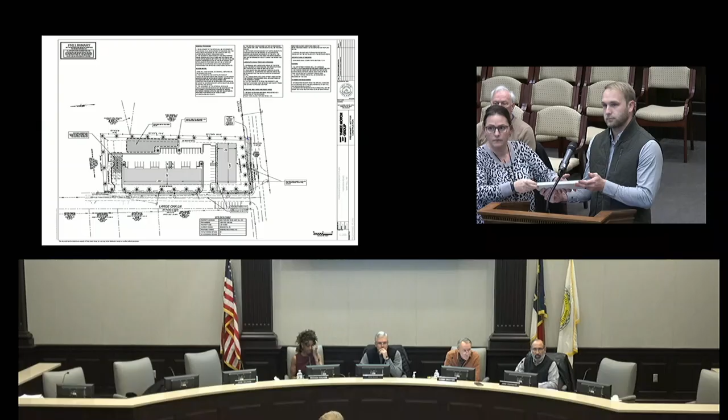Maybe... Space, no, bar. Sorry. Here, I'll just run it. Yeah, there you go, we'll just do it. Was that me or you? I'll run it. Okay, just tell me when to change it.

Yes sir, as you can see, the Large Oak Lane unit will be more sectioned off into smaller units for more small business type operations that has storage and a small office with it. The one facing Fairview Road will be more standard office businesses that you see. There will be a septic system on this parcel, as you can see in the back right corner if you're looking at it from Fairview Road. The sewer stops a couple parcels back, kind of in front of the firehouse there, and then it starts going negative fall back towards...

485. So we had to design a septic system onto this one. Not what we wanted to do. If there's any way we could get tie into that septic or sewer system, that would be what we prefer. But as you see right now, it's designed for a septic system to make sure it would work. And then we have an underground detention system on the back of the property that would house all the stormwater. We do have a fence and trees that outline the property, kind of for hiding the parking.

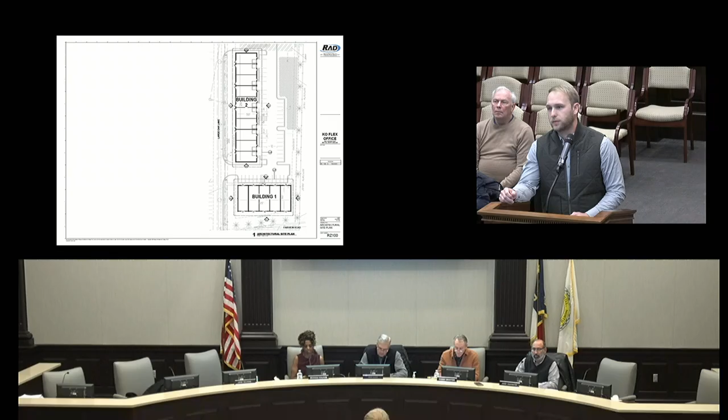These are the kind of standard layouts that we have for the elevations. Four-sided brick. There will be windows and doors in the front. The back sections will come with a roll-up garage, as you'll see for the flex side. You can go to the next one, John. There's the back section. So each unit will have its own warehouse type space, and we'll put an office in there as well too with it.

These are just more side elevations, back elevations for it. Kind of more up close.

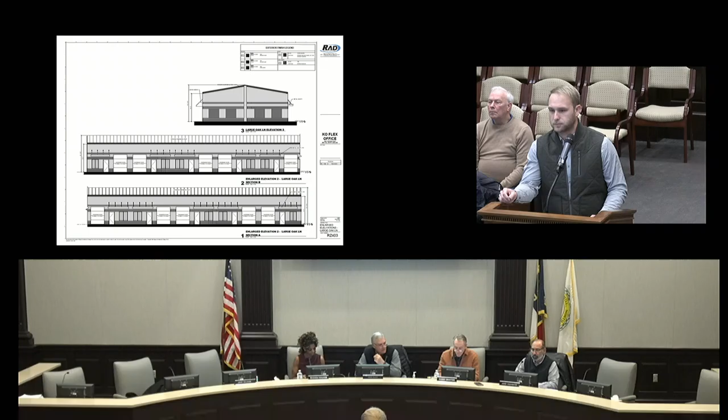Jim, anything? Yes, how did you estimate the number of parking spaces necessary to support these two buildings? The parking that we have here, we followed the outline you guys have in the UDO. So it's 2.5 parking spaces is what we have right now. Obviously that's not what we wanted, but with the septic system and underground detention system, we tried to fit as much as we could on there. If there's any way possible we can get more, we're not opposed to that. But as it sits right now, that's where we could fit them in.

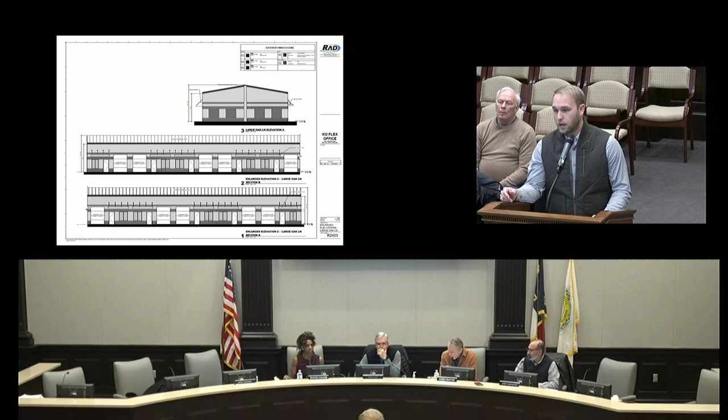Kenny? So this will be primarily storage? Not storage, no, it'll be office warehouse. Think of an HVAC contractor who needs office space to run a couple people out of the office and have storage for their metal bending, or auto detailing that rolls a car in there to detail, with office space for office work. So we're targeting more small business, the smaller side, people who need space to store a couple things and work on them, as well as that true office feel with a couple desks and a couple assistants.

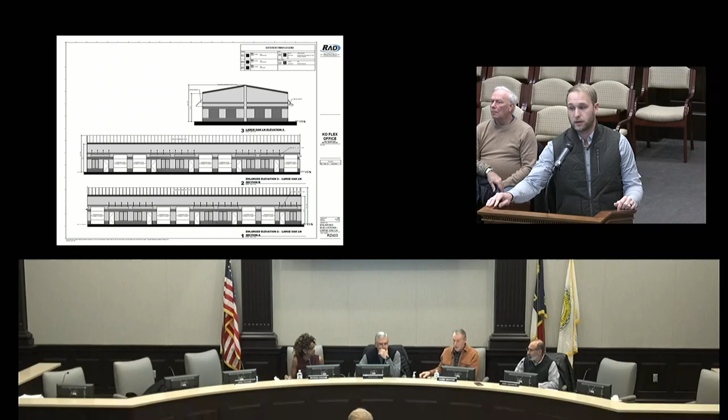Okay, and I was thinking there was a plan that had topo on it. Do you remember if y'all had a plan with topo? Because what I was getting at is you have underground detention, and I didn't see a way, it looks like the only place you can send it is to the back right corner if you're looking at it from Fairview. Is that the way the topo runs, enough fall there to have a positive outfall for the underground detention? Oh yeah, absolutely, because that's the way it all tracks back to that back right corner. Because the parcel to the back right, if you're looking at the paper, that's where the pond is for that park. So all of it falls back towards that pond.

But your underground detention is going to be, what, 4 feet beneath the ground? It'll have to be spec'd out by the engineers depending on capacity. That's what I was getting at, and the reason I'm saying this is if you're planning on it and it doesn't work, we need to know that now. But the underground detention, will it have enough capacity for what we're looking at here? Yeah, definitely. Well, I'm talking about the release. The release, yeah, it's engineered for that.

Okay, so they've got a positive outfall from the bottom of the underground detention. Yes, sir. And that's in the greater detail of our engineered plans, not in just the zoning plan we're showing here.

Okay, yeah, I didn't see that much relief on your site, so I was thinking, are you going to have to get an easement from this guy to dig and put in a ditch or pipe? I didn't see how. No, the outflow should come right out the back, and we should have enough fall from there because we'll build the site up. You can see the retaining wall where the parking spots are. Once that's built up, we'll have enough fall coming down from that retaining wall to get back to that corner, as well as natural fall, because that's where it all slopes right now too. But it's got to fall from 4 feet beneath that retaining wall. Correct, yes sir. So I was just concerned that you had enough room for that.

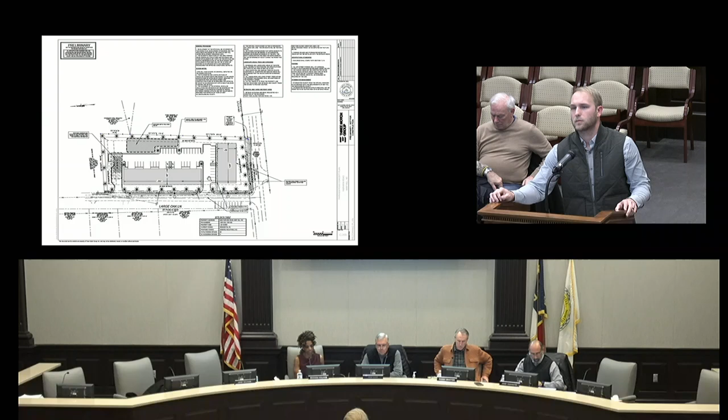All those little star sections there where the road is are the trees on the property. Yes, and they're roughly 30 feet apart? No, I'd say they're closer than 40. No, they're farther than that. Let's see, 1, 2, 3, 4, 5, 6, 7, 8, 9. Say they're roughly 50 feet apart.

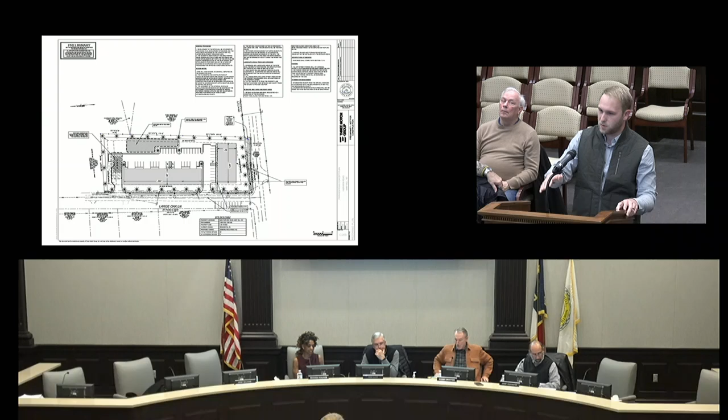What I was saying, understory in between the large maturing canopy trees. I see what you're saying. So you're looking at a large maturing canopy versus a small maturing tree, just lining with tall big trees. And I'm thinking whatever goes next to there, what's there now, John?

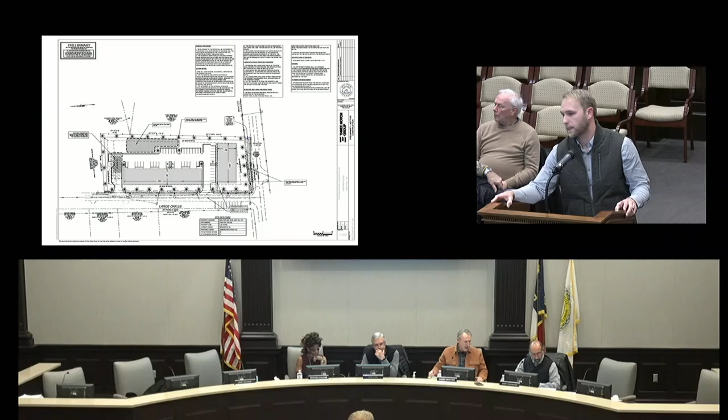Is it on the east side? Is that residential or is it? That's that way. Right now there's a house there. I'm not sure of the directions. Towards 485, yeah, it's 2 homes.

Right there. So if those stayed for whatever, like I said, add some understory screening, that's fine, that's no problem. But I don't think there's enough right of way to put in turn lanes. Right turn lanes are nice, but they're not a problem solver. Left turn lanes are the problem solver, but the problem is having enough room to fit them in. And I don't know that we'll ever have enough room to widen.

Fairview to accommodate a third lane. Oh yeah, I agree, because even going where the bank is, that left turn lane, people get confused and they're going in right there with the BP. So trying to do, I'd say an unfavorable recommendation.

I'd like—all right Jim, you got anything else? No. All right Kenny, so can I get a motion? I'd like to make a motion for an unfavorable recommendation. All right, you need to read this whole thing here.

It's part of your motion. ZC 25-11 appears to be inconsistent with the adopted land use plan, which designates the subject properties for mixed residential. This area is characterized by moderate density residential development, comprised predominantly of single-family detached homes, as well as attached single-family units such as townhomes and duplexes. The mix of housing types is intended to create intergenerational neighborhoods and appeal to a variety of age groups and lifestyle preferences.

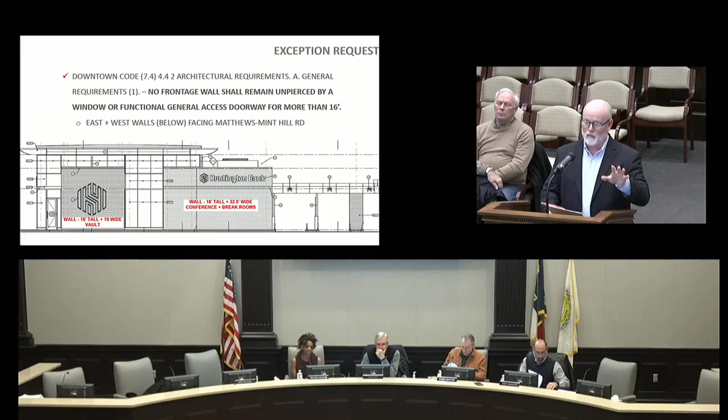Now, there are some design features incorporated into this building that will help mitigate the exception requests we're asking for. One will be the use of signage along these areas to break up those walls. Differing exterior building materials will also be used — you'll see in the following slides we have some glazed brick for one portion, white brick for the other. There'll be windows along the front, and also a roof overhang.

There is a ribbon of windows along the top that'll offer a lot of natural light inside the building. The roof overhang will project out just about as far as the vault wall itself, so there'll be a lot of differing materials, and it just will not be a stark looking wall there.

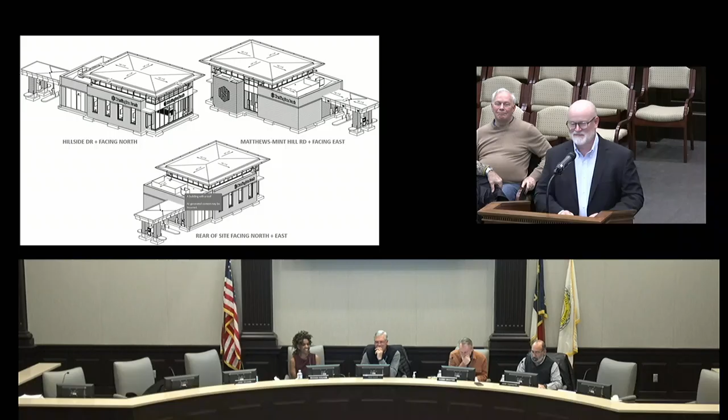I like it, the way it looks, but I'm wondering if it would go with the rest of the town down the street with the colors. I mean, green is my favorite color, but maybe I'm just thinking too far ahead. Has no one thought about that? I don't think we have a color definition. Okay, in the ordinances it doesn't matter. I'm red-green colorblind, so don't look at me.

It's just that we've got the regular brick going all the way down. That's all I have. Understand? Okay, yes ma'am, thank you. All right, Kenny? Thank you, Mr. Chairman.

Thank you, Eddie. I'm just worried when people come in... once you get past the lane coming out of the drive-through into that main stub that comes off of Hillside, there's a bunch of area to the right that I'm thinking about. It was an all or nothing deal when it came to the potential purchase of the property itself, and the bank wanted the hard corner. The question did come up during the Board of Commissioners meeting, and this is conditioned for the drive-through and then the bank itself.

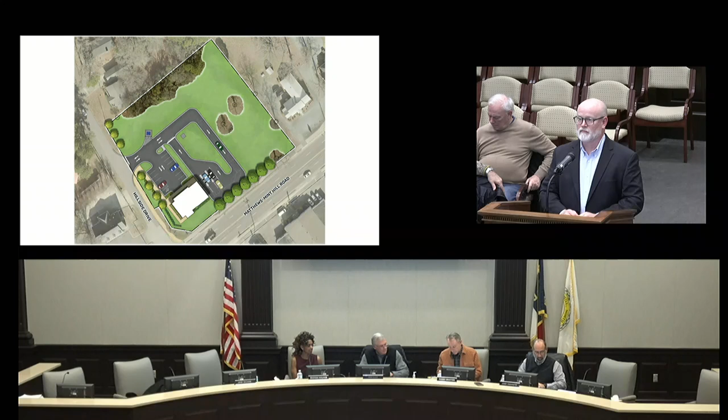Where the existing house is, there's a bunch of land off to the right, the northeast/east side of the site that's not being disturbed. We've done the preliminary grading and we're not going to that portion of the site or do any grading there. It'll always remain open space, just part of the bank property, but there's no plans to develop that piece.

Can I jump in? Is the house to remain? Both of them are coming down. So this will ultimately just be a big green grass yard afterwards? It will be.

The only other question I had was about the proposed elevations. That picture John had up there, looking at that house, how it's set down - you're raising the bank, not all the way flush, but about halfway up? It'll come up slightly. We have to be careful, it's fairly flat but it does all fall to the north. Thinking back on the preliminary grading, I don't think we raised the site too much at all.